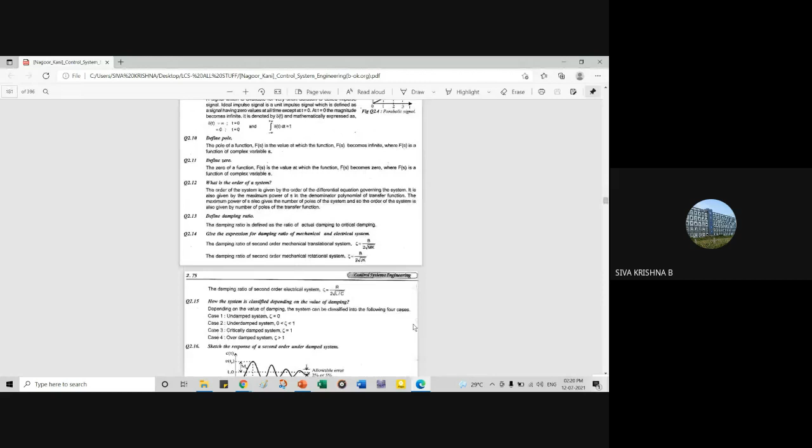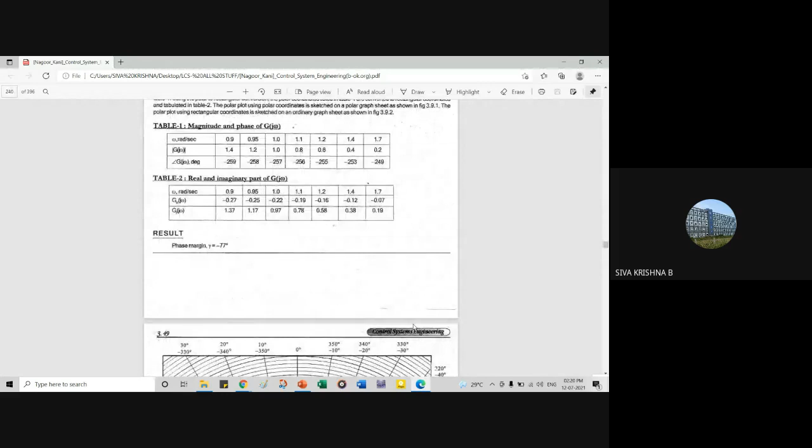Yes, see this. So we already discussed about these small things.

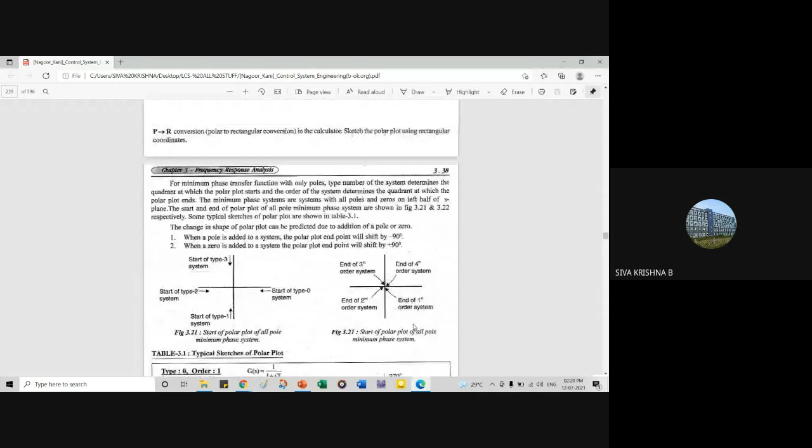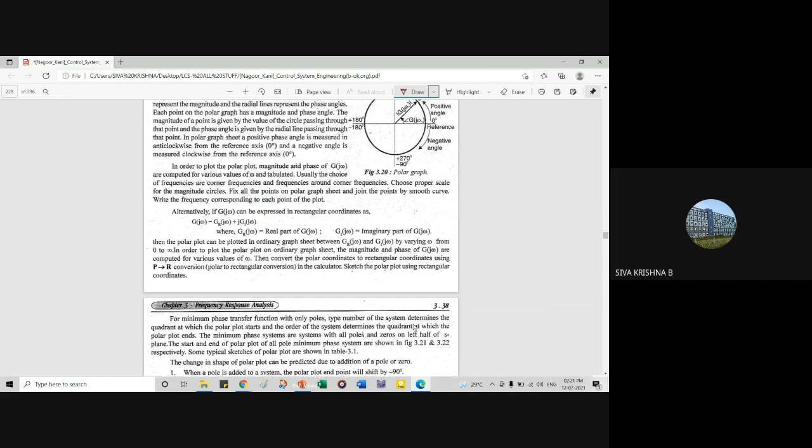See this one. Is this visible, all of you? Yes, sir.

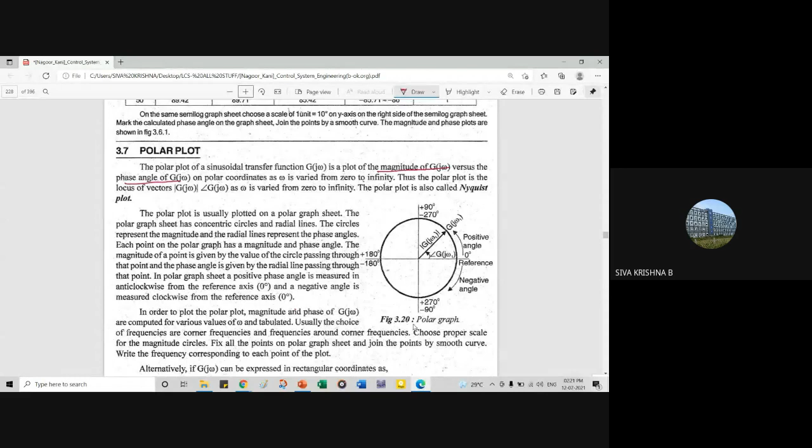Okay, polar plot is nothing but magnitude versus phase angle. Magnitude of G of j omega versus phase angle of G of j omega, isn't it? So always omega is varied from 0 to infinity. Always.

So the polar plot is also called as Nyquist plot, because just the mirror image of polar plot is Nyquist plot. Mirror image of polar plot is Nyquist plot.

See here, polar plot is usually plotted on polar graph sheet. It contains concentric circles and radial lines. We already discussed about this, so circles like this and some lines are like this. Yes or no? We checked this in the last graph, isn't it?

So it has many number of circles like this continuously. And then the circles represent the magnitude and its phase angles. Radial lines indicate phase angles - these lines are nothing but radial lines. Circles are nothing but magnitudes. These represent magnitude, these lines represent phase angles phi, and these represent magnitude m.

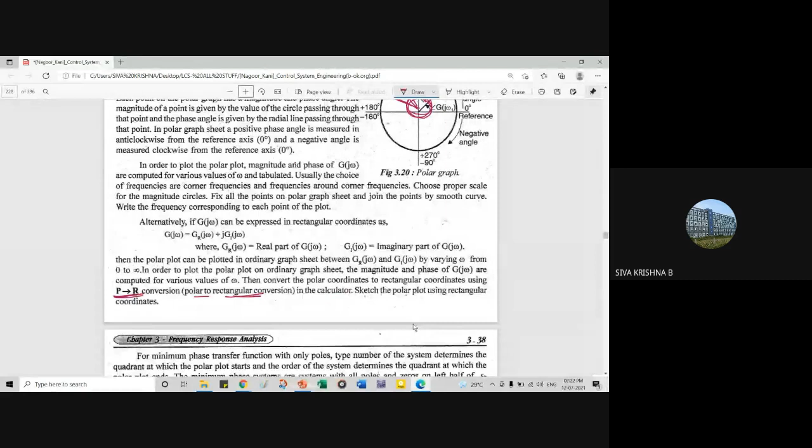Okay, and also we converted from polar form to rectangular form, isn't it? Polar to rectangular by using this calculator. And after that we draw the polar plots. Before going to that,

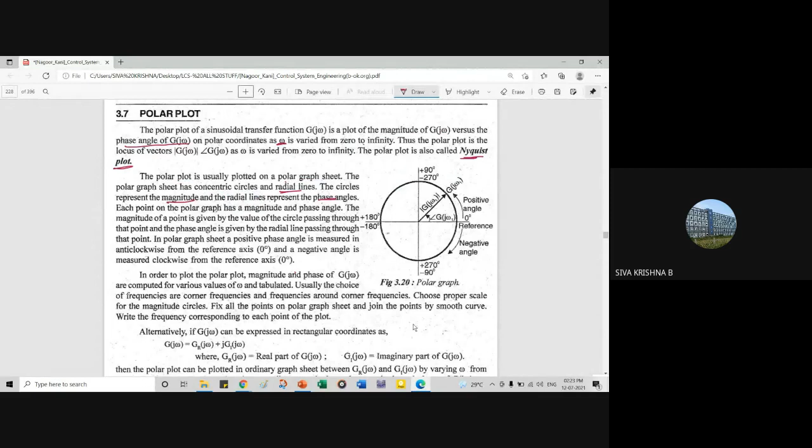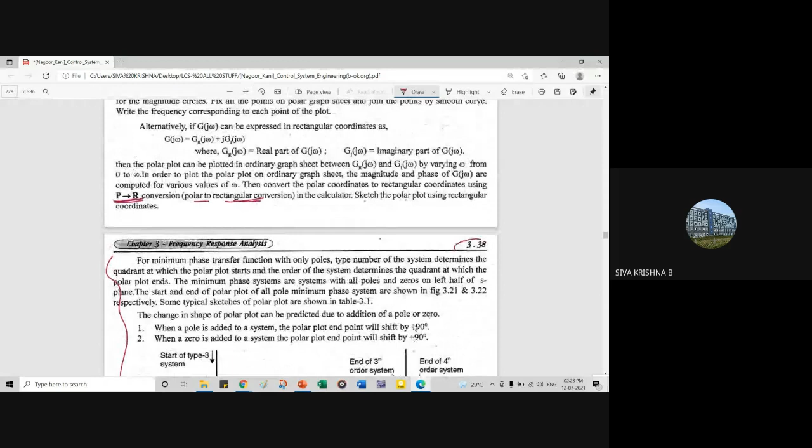so see, all of you go through this part yourself. Page number 3.38. Okay, page number 3.38, go through all of you. Go through that page, that is the most important one. You will get some idea about it.

So if type 0 is there, so where the plot will be, and where the start. This is starting direction, and this is ending of polar plot - ending direction of polar plot. If type 0, where will the starting be, where will the ending be, if order 1 what happens, if order 2 what happens.

All these things, please go through this total page, all of you. Individually check this, you will get some idea about it. Let me tell you about this.

Already we solved this problem in the class itself. That means it is having type 0 and order 1. This problem is having type 0 and order is 1.

If my voice is clear, all of you? Yes, sir. Voice is clear, yeah okay.

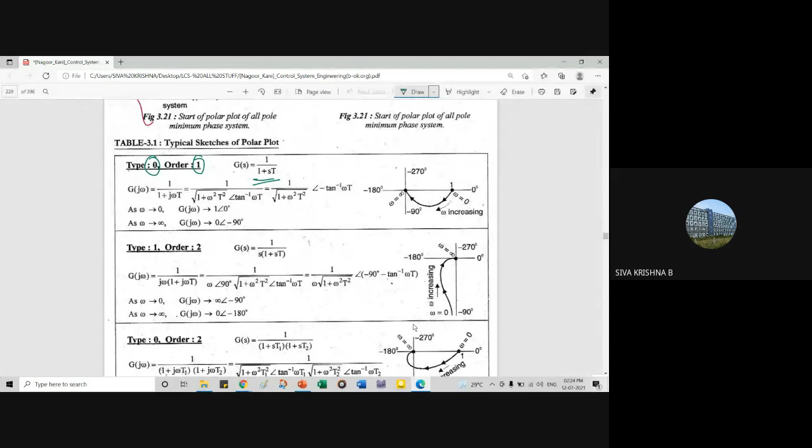Condition where? So, text book. Yes. Is this better or else previous one is better? Previous.

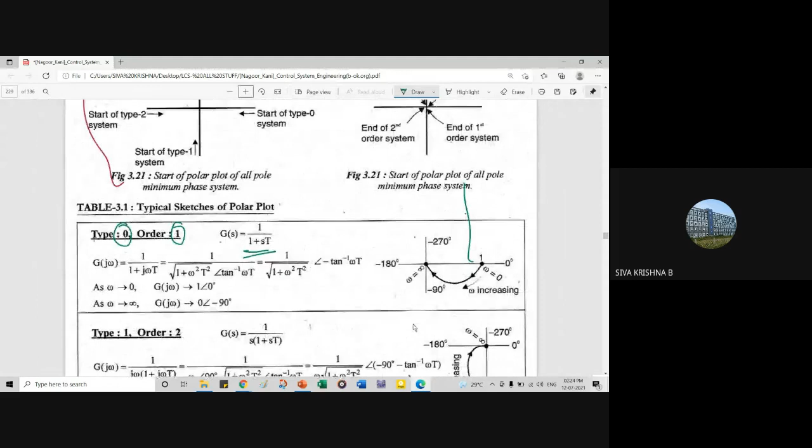Just find out for these two values only. Find out magnitude and phase. This is nothing but m at an angle phi. So how to find the magnitude? First, this is converted into j omega domain, right?

After that, we are applying magnitude, that means real part square plus imaginary part square. Imaginary part is J omega T, that means omega T is the imaginary part value. Okay, so real part square plus imaginary part square. So this is finished. Coming to this tan inverse, what is this?

Tan inverse of imaginary by real, that means phase angle. So if you take this upside, that becomes negative, so it is negative here. Okay, like this, you have to find the magnitude and phase angle.

After that, put omega equals to 0. Put omega equals to 0 here. So 1 by 1 plus 0, that means 1. So 1, tan inverse of 0, tan inverse of 0.

So tan inverse of 0 is 0 degrees, simply 1 at an angle of 0 degrees.

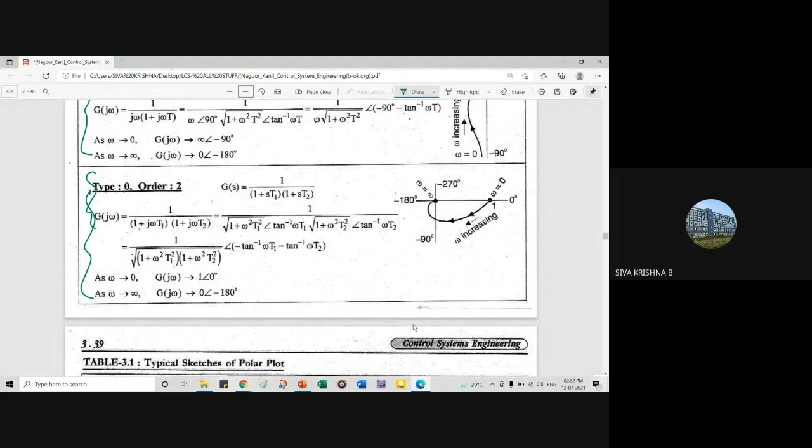ఎన్ని ఉన్నాయి ఇక్కడ చూడండి, సింపుల్ థింగ్స్. జస్ట్ 5 minutes పడుతుంది ఒక్కొక్కటి, లేదా 10 minutes హార్డ్లీ. ఇంతవరకు మీకు తెలుసు ఆల్రెడీ. మ్యాగ్నిట్యూడ్ ఎలా ఫైండ్ అవుట్ చేస్తాము, ఫేజ్ ఎలా ఫైండ్ అవుట్ చేస్తాము, ఆల్రెడీ ఇవి కూడా చెప్పాను. డిఫరెంట్ వాల్యూస్ తీసుకొని చెప్పాను. ఈ రెండు చెక్ చేసి గ్రాఫ్ ఎలా చేస్తున్నాడో చూడండి అయ్యా బాబు అంటే

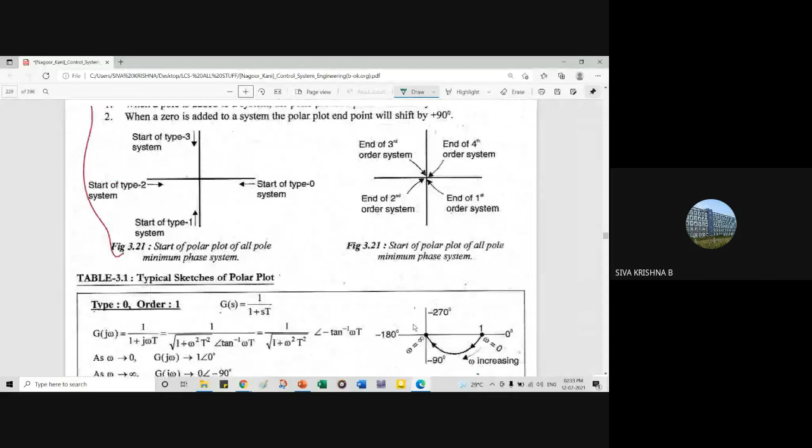అసలు ఇంకెందుకు మా అనవసరము. ఏం చేద్దామని చెప్పండి, పాస్ అవ్వాలని ఒక్కరికన్నా ఉందా కనీసం? మీరేదో చేస్తారని నేను అడిగి మరీ తీసుకోవడం నాది కదా తప్పు. నమ్మకం అనేది ఎవరి మీద పెట్టుకోకూడదని మీరు చాలా బాగా ప్రూవ్ చేశారు, ఎస్పెషల్లీ సి సెక్షన్.

Is there any problem, guys? Is this clear? Hello. Maralera. No, sir. Clear, sir.

Similarly, see this one. అట్లాగే సెకండ్ చూడండి. ఇప్పుడైనా డ్రా చేశారు ఒకళ్ళన్నా? సెకండ్ చూడండి ఒకసారి.

See this. G of s equals to 1 by s into 1 plus st. ఇచ్చిన క్వశ్చన్ ఫస్ట్ టైం కాన్స్టెంట్ ఫామ్ లో ఉందో లేదో చెక్ చేయాలి. ఆ తర్వాత మనం ప్రొసీడ్ అవ్వాలి. అది గుర్తుపెట్టుకోండి. టైం కాన్స్టెంట్ ఫామ్ లో ఉందో లేదో చెక్ చేయాలి. తర్వాత s ని j ω గా మార్చాలి. ఆ తర్వాత మ్యాగ్నిట్యూడ్ ఫేజ్ ఫైండ్ అవుట్ చేయాలి. దట్స్ ఇట్. 3 simple steps.

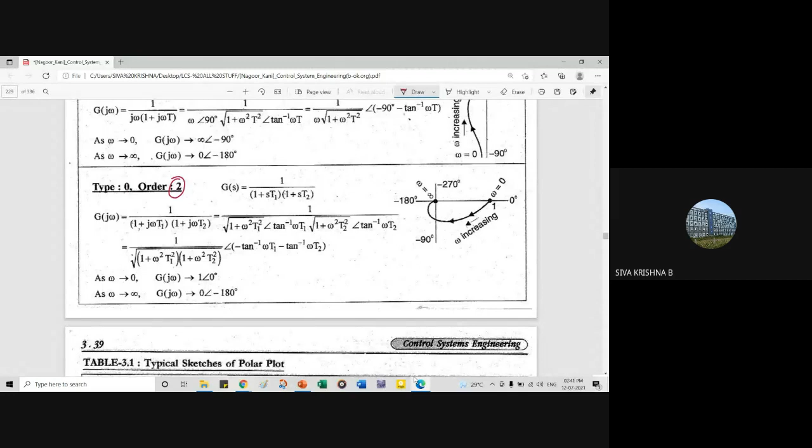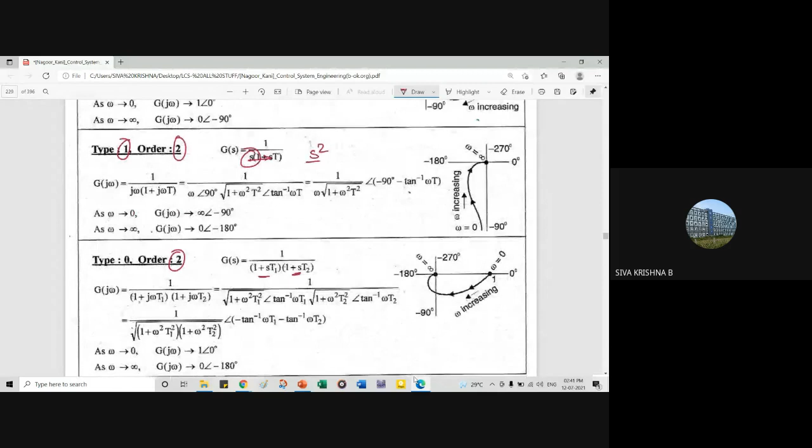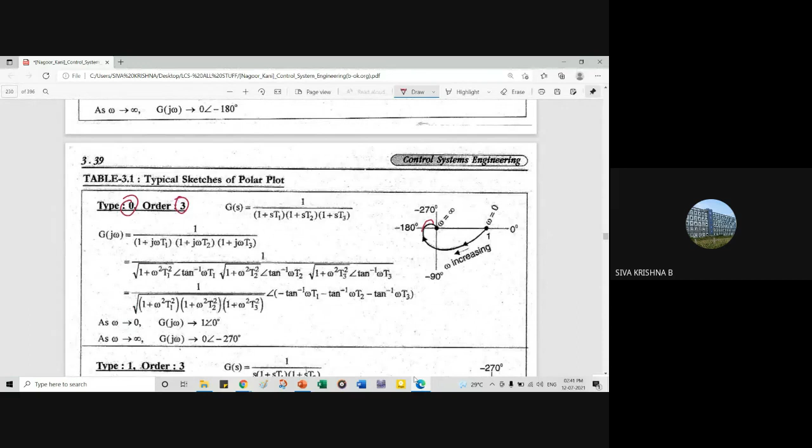ప్రతిదీ చెక్ చేయండి, ప్లాట్ ఎలా మూవ్ అవుతుంది చూడండి. టైప్ 1 ఆర్డర్ 2కి ప్లాట్ ఎక్కడెక్కడ ఉంది. టైప్ 0 ఆర్డర్ 2కి ప్లాట్ ఈజ్ ఫ్రమ్ 0 to -180 దాకా వెళ్ళింది. నెక్స్ట్ ఆర్డర్ 3 తీసుకునేసరికి ఇంకొక 90 degrees షిఫ్ట్ అవుతుంది. సీ ద చేంజ్ బిట్వీన్ దీస్ టూ, సీ ద ప్లాట్స్ ఆఫ్ దీస్ టూ డిఫరెన్సెస్. చూడండి ప్లాట్ ఎలా ఉందో, ఆర్డర్ 2 వచ్చేసరికి 180 దాకా వచ్చింది. ఆర్డర్ 3 వచ్చేసరికి 270 degrees టర్న్ అయింది మళ్ళీ. ఇట్ టచెస్ 270 degrees లైన్. చెక్ దీస్ కంపారిజన్స్ లైక్ దిస్. అందుకే మీకు చెప్పాను అవి కంపేర్ చేస్తారా.

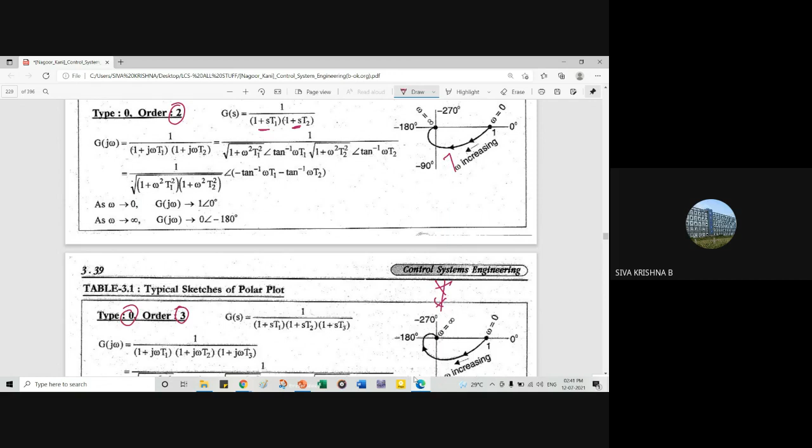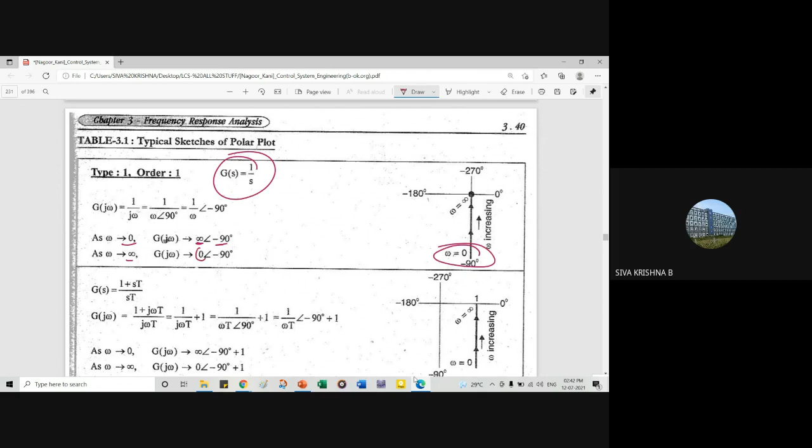Okay, like this you have 10 problems exactly, go through all these things. So type, you see here, single pole. At omega equals to infinity, at omega equals to 0, it is infinity with -90 degrees. Here, minus infinity. Infinity is there, so at omega tends to infinity, 0 at an angle -90. So both are at same angle, that means simple straight line. It means that simple straight line like this, always from omega equals to 0 to omega equals to infinity. The polar plot direction is always from W equals to 0 to W equals to infinity. It is a simple straight line.

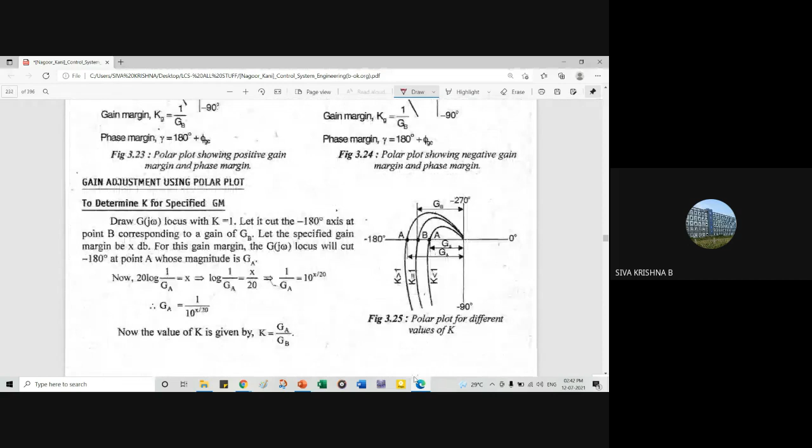Okay, similarly, see the remaining zeros and poles, all those things. Okay, and I already discussed about these things, right? Polar, unit circle, gain margin and phase margins, all those things.

So now we will move on to the Nyquist plots. Just take the mirror images of polar plots. ఇప్పటిదాకా మనం జస్ట్ స్టెబిలిటీ ఫైండ్ అవుట్ చేయడానికి జస్ట్ ఫోకస్ ఆన్ లెఫ్ట్ హ్యాండ్ సైడ్ ఆఫ్ అనాలిసిస్ ఉంది. లెఫ్ట్ హ్యాండ్ సైడ్ అనాలిసిస్ మాత్రమే ఎక్కువ చేసాం ఇప్పటిదాకా. అంటే క్యారెక్టరిస్టిక్ ఈక్వేషన్ తీసుకొని ఫైండ్ అవుట్ చేయడం. మనం డిఫరెంట్ టెక్నిక్స్ యూజ్ చేసాం కదా, రూట్ లోకస్ అని, RH క్రైటీరియా అని. ఓకే, డిఫరెంట్ టెక్నిక్స్ యూజ్ చేసి మనం ఫైండ్ అవుట్ చేసాం. Now we are going for the Nyquist plots purely for right hand side analysis only. Nyquist plot is for purely right hand side analysis only. It will check how many poles are in the right hand side plane, and it will tell about the stability.

So now tell me, what are the stability conditions and unstable conditions and marginally stable conditions? Where are the poles and zeros located? For stability, where are the poles and zeros located? First tell me, what are the locations of this?

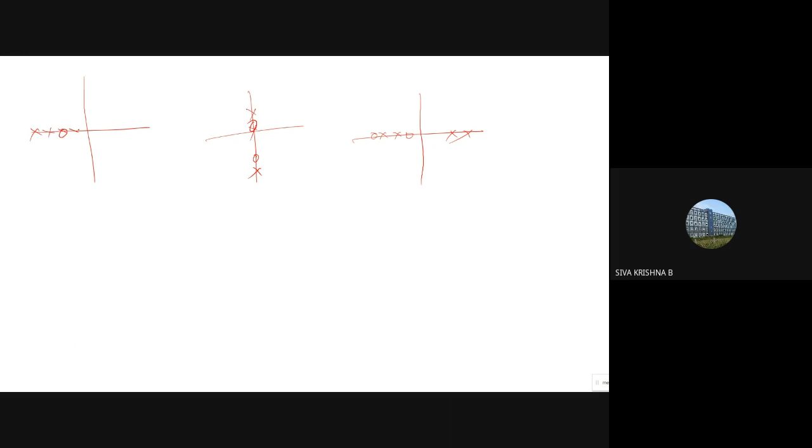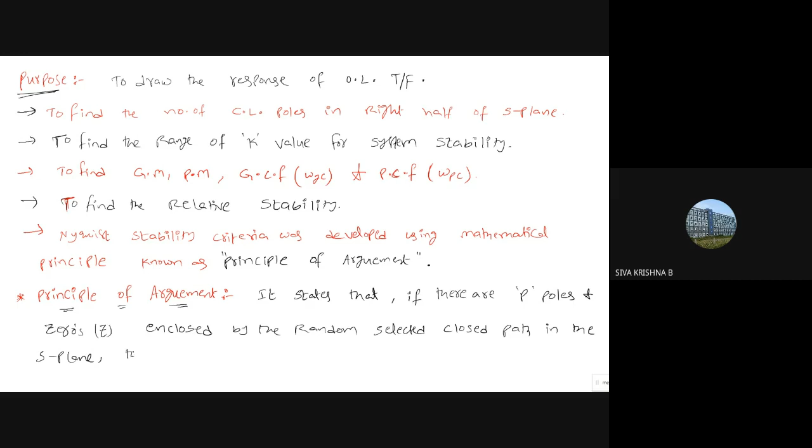In the S plane. Then the corresponding GH plane, that means G of S, H of S plane. Encircle the origin with, that means GH of S plane encircles the origin, with p minus z times.

This is all just for yourself, just theory part. Problems not yet started, right? With p minus z times, that means number of encirclements. Number of encirclements is nothing but n, which is equal to p minus z. Hold on, n equals to p minus z.

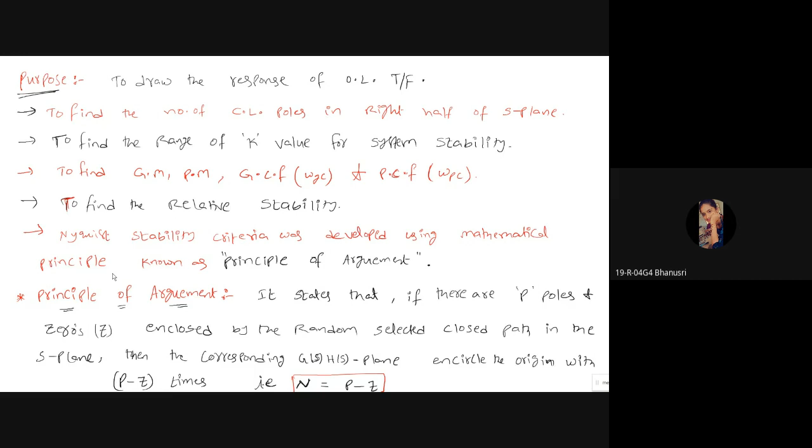Okay, next, we'll try a simple thing. Please note down as simple as possible. Let me take S plane, and here is GH of S plane. S plane is one thing and GH plane is another thing. So let's take some poles and zeros. So 0 and 2, or 3 poles are there. Let me take like this. Okay.

So how to draw this in this GH plane? Let me change this color. So just I take a pole here. I enclose a circle like this. Just I took only one pole for assuming. Just assume like this, suppose this is -1, 0 and -3 like this. So here,

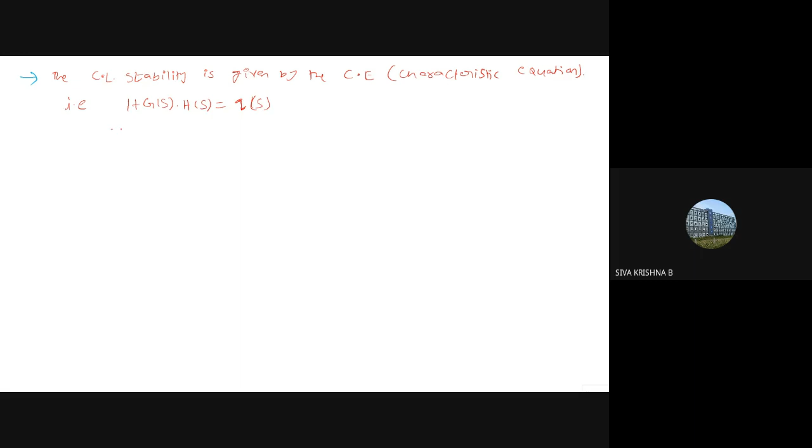Is given by the characteristic equation. That means what is that? 1 plus G of S into H is equal to 0. Exactly equals to 0, but assume some variable, some Q of S. Why? Because you have to compare the previous equation with this one. But assume just one, that's it. Now substitute this one. Q of S equals to 1 plus what is GH?

What is GH? K into numerator by denominator. Now apply this LCM here again. D of S plus K into N of S by D of S. Now assume this is the equation 3.

Now what about this? What about zeros are here? These are the zeros we call as zeros of CE. Now see in second equation, what are those? In closed loop transfer function, what are these becomes? Poles of CE. But in characteristic equation, this becomes

zeros of CE. So you have to observe these two steps here carefully. It is just theoretical part only. Don't mind, don't bother about this. If you take characteristic equation, zeros of CE, those becomes. If you go for the closed loop transfer function, it becomes poles of CE. How it is, another observe check.

So from equation 1 and 3. So poles of CE is nothing but what? Poles of, what are the poles here? My equation 1 and equation 3 check. Poles check, poles of characteristic equation. Poles of CE in this equation is nothing but in equation 1, what are those? G of S. G of S means whether it is open loop or closed loop.

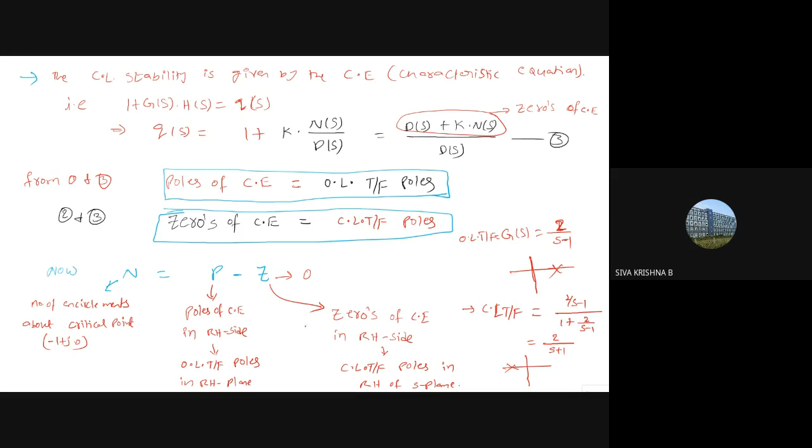How that happens, we'll explain after doing a problem. Up to here, completed all of you? Yes, yes. Okay, make a note there.

To become the closed loop system stable, there should not be any closed loop pole in which plane - right side or left side? Right. Right hand side of the S plane.

The closed loop pole is nothing but what is that? Which is also called zeros of CE - zeros of the characteristic equation, which must be 0, normal 0, in the right hand side plane.

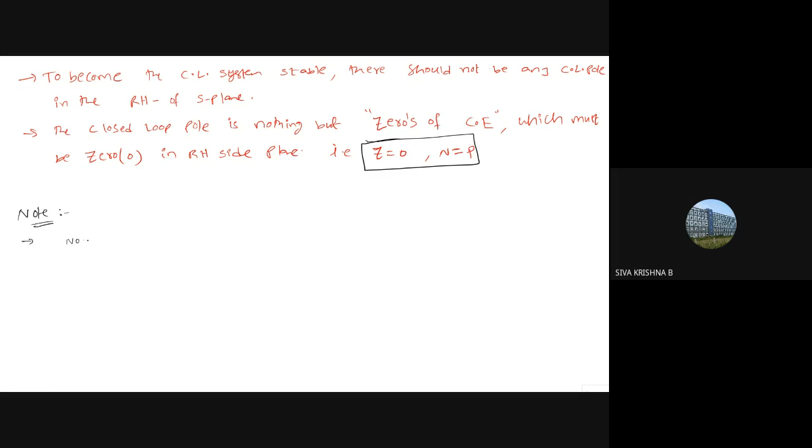Number of infinity radius half circles equals to number of poles at origin. Number of poles at origin.

Next, the infinity radius half circle - the infinity radius half circle should start where the mirror image ends. It will start where the mirror image ends.

Similarly, on the infinity radius half circle should end where the actual polar plot started.